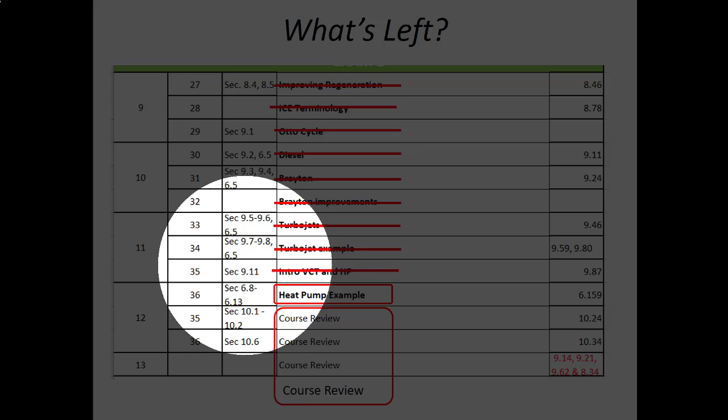So today is the last class with new material, and it's new in that we'll be doing an example of a heat pump cycle, which, as we learned last class, is essentially the same as a refrigeration cycle. The difference is our energy benefit — whether we're interested in cooling down the cold place or heating up the hot place.

After this class, we have 2 more classes this week, which I've reserved for course review, and then also 2 classes next week because the semester doesn't end till Wednesday. So we have a total of 4 potential review lectures.

My idea for the first review lecture is to have maybe 10 minutes of content to share, a general overview of how to do cycles. But then I'd be interested in having students look through the textbook and pick a cycle type that we can go through together as an example — something I haven't seen before, so you can ask me the question and I'll show you the method I would use to solve it.

So in 2 slides, we'll talk about which different cycles we can look over, and if people have a preference of which cycles we can do on which days.

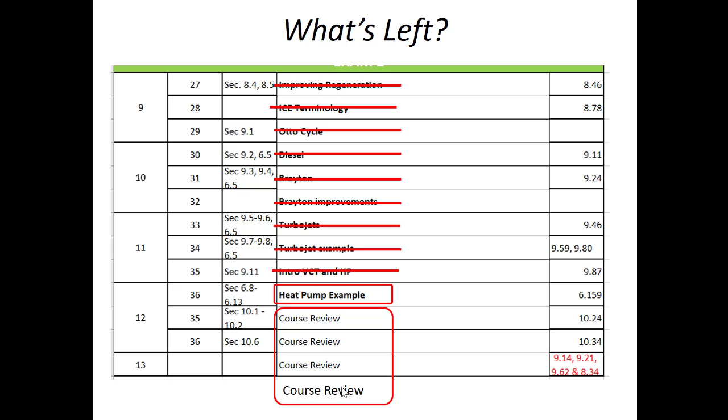But before we do that, today is August 3rd, Monday. So we have all of this week and then half of next week until the end of the semester. And then we will have our final exam on the 14th.

That's the Friday. The final exam will consist of 10 multiple choice problems, just like the midterms, but then 3 long answer problems — an extra long answer problem versus the midterm exams. You can certainly expect that these long answer problems will ask you questions about the cycles we've been going over since the second midterm.

In the midterm exams, we ran the exams from 3 to 7. Because there's an extra exam problem here, I've extended the time by half an hour, so we'll go between 3 p.m. and 7:30 p.m. Eastern Standard Time, the time here in Rochester.

Just like for the midterms, I'll run a meeting in this same meeting room from 5:45 to 7:30 if people have questions. You can also send me emails with questions, and I'll try to be on top of those in real time as they come in, so I can answer emails as well.

If you have approved accommodations, we will adjust the time accordingly based on the accommodations approved by the university. I'll put out a notification of this timing on the website right after class, and I'll also send out an email asking people to let me know if they have a conflict with this exam time as soon as they can, so we can reschedule to a different time.

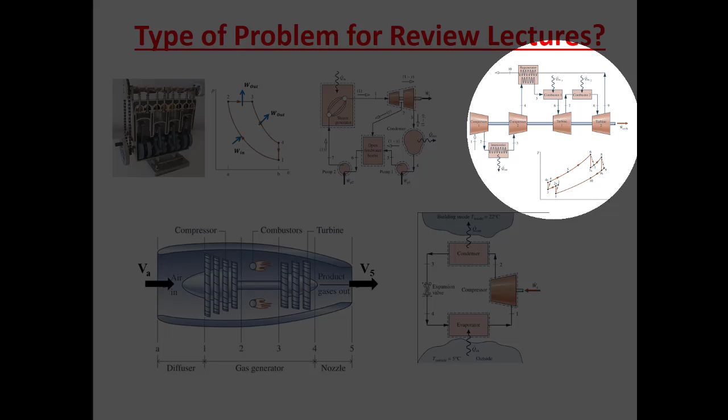Then we talked about Brayton cycles. Here's a picture of a Brayton cycle with all the trimmings - it's got intercooling, reheating, and also regeneration here. So knowing how to draw a TS diagram like this and analyze a cycle like this could be important. We could go over a class like that, or a cycle like that.

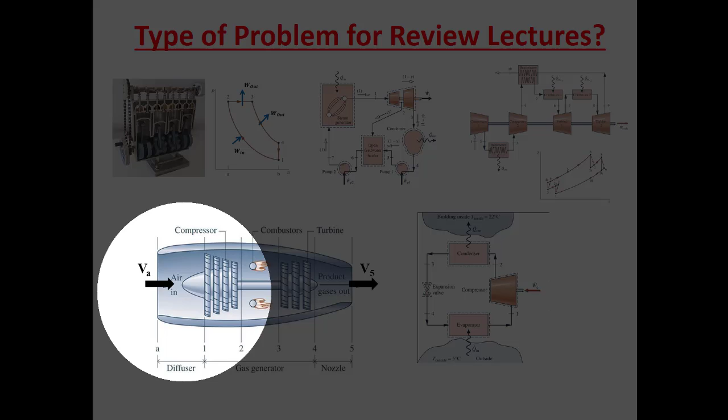We talked about turbojet engines. The difficult part about the turbojet engine is the diffuser and the nozzle, since we have this kinetic energy part of the problem, which is something we don't see in other cycles. It's also a cycle where the working fluid is an ideal gas. So just like with internal combustion engines and Brayton cycles, it's important to be able to identify the isentropic processes here so we can figure out when we're supposed to use the isentropic relationships.

Finally, the last type of problem we did was this refrigeration or heat pump cycle. We're going to do an example of that today. Really, this is the same cycle - it looks like a Rankine cycle in reverse, but we have this expansion valve instead of a turbine. If it's a refrigeration cycle, we're interested in the heat coming into the evaporator, leaving our cold reservoir. And if it's a heat pump, like the example we'll do today, we're interested in the heat leaving our condenser, going into our hot reservoir.

So I guess we have four students here today. Does anybody have a preference for what cycle type we talk about next class? Is there a type of cycle that you found particularly difficult?

I would like to look at diesel cycles more. Sure, so Jack, do you mind? This is, I guess, when you answer the question you're also volunteering a little bit. Because I would like for the first time I see the problem to be when we get to class, so you guys can have the opportunity to see how I would solve it. Do you mind trying to find a sample diesel cycle type problem for next class? That's fine. Perfect. And then I thought someone else was unmuted there before Jack answered.

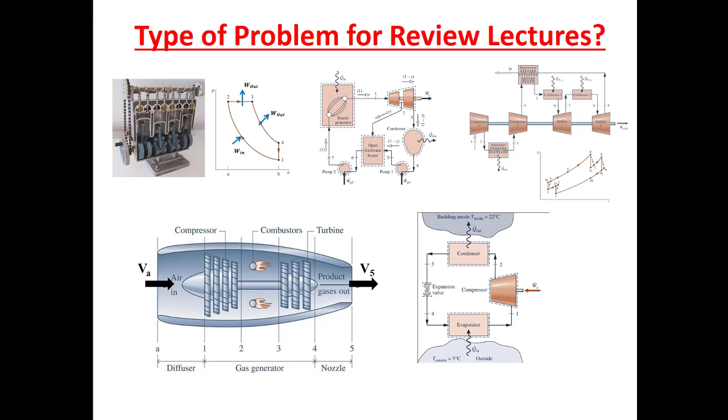So with that, we'll move on to today's lecture. Today we've been talking about these vapor compression heat pumps and refrigeration cycles, right?

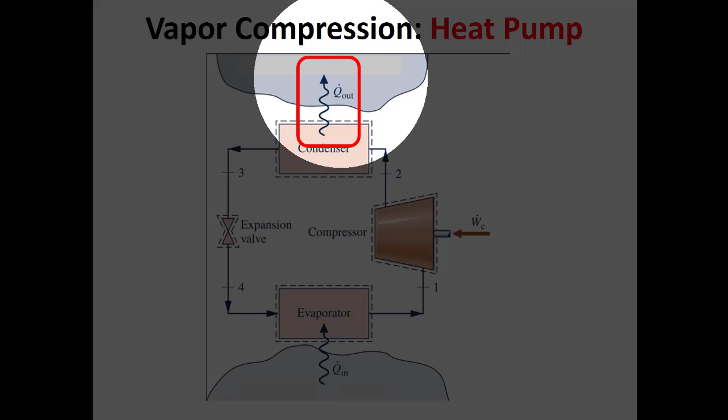I've been talking about how they're kind of like doing Rankine cycles in reverse. So the difference between a heat pump and a refrigeration cycle, in both cases it's like a Rankine cycle where we're moving back and forth across the vapor dome, but it's different than a Rankine cycle because the energy benefit and the energy cost are different. In a heat pump, the energy benefit is the heat leaving our condenser that goes into our hot space. So the purpose of the heat pump is to heat up the hot space.

It's important for all of these cycles to be able to draw TS diagrams. When we're drawing a TS diagram, one question we have to ask is, what's the working fluid? Because if the working fluid is water or a refrigerant, we need to know to draw a vapor dome. So that's what I've done here.

I know that as I move through the condenser, I'm going to condense the fluid. In this case, this is probably a bit unreasonable for a real case, because you probably want your evaporator to have saturated vapor over here, so your compressor is compressing a vapor. But I wanted, when I drew this cycle the first time, to have one constant temperature at rejection and one constant temperature at the heat transfer in. So here it's all under the vapor dome, which wouldn't necessarily be the case.

In our condenser, we're condensing our liquid until it gets to a saturated liquid. Then we move through the valve. Here in the valve, I've intentionally drawn this as a slanted line, not vertical, because I want to note that this is not an isentropic process. Remember, the assumption we make when we go through the valve is that it's isenthalpic, meaning delta H is equal to 0.

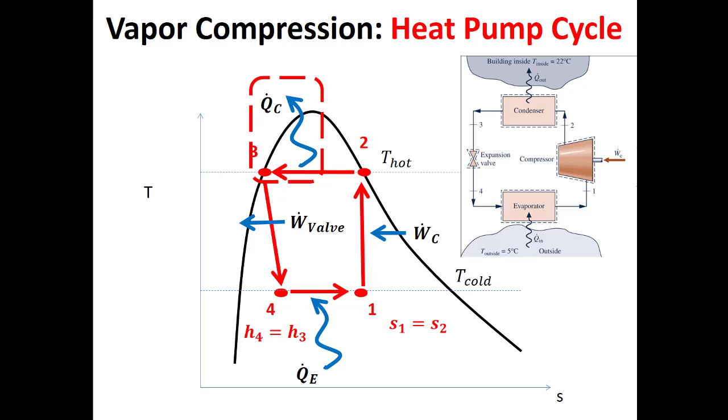So here, if we want to define our characterization parameter, because this is not a percentage value, it doesn't go between 0 and 100% or 0 and 1, we don't call it an efficiency. Instead, we call it a coefficient of performance. It's still energy benefit divided by energy cost.

In a heat pump, the energy benefit is the heat transfer on the hot side, and the energy cost is the power required to run the heat pump. Remember, we've got to plug this into the wall to run that compressor.

Because the mass flow rate is the same for both the heat transfer on the hot side and for the power going in, we can make these little q dot divided by little w dot, which is just going to be delta H divided by delta H. We just got to make sure we get the right state numbers in there.

We could, or a problem could ask us to compare our actual performance to our Carnot or our ideal performance. And if we wanted to find the Carnot performance, we would take T hot divided by T hot minus T cold. And we'd have to remember to do this using absolute temperatures, so this is either Kelvin or Rankine.

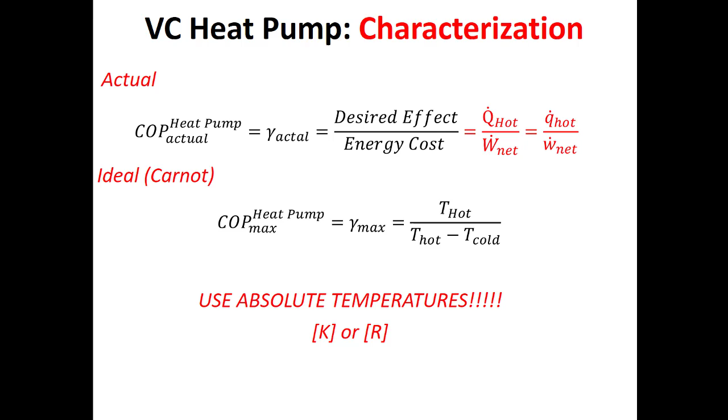So what do you do if you're lost? If you're on this kind of a problem, or really any kind of problem, you've got to ask, is it open or is it closed system processes as I'm going through my cycle? In this case, it's open system processes because the mass is moving through our cycle and different processes are happening in different components. So we've got to say, where do we draw the control volume?

What happens to the mass? So conservation of mass here, we're not splitting anything off, so conservation of mass is pretty straightforward. M dot in is always equal to M dot out. So there's only one mass flow rate in this problem.

Then we've got to say, what happens to the energy, right? So we could do the first law on each of these different components. And in an exam problem, we could ask you to demonstrate that certain processes were possible. So you could do a second law analysis to figure out if that sigma dot term was positive, because that's what we know for real processes. We're always generating entropy.

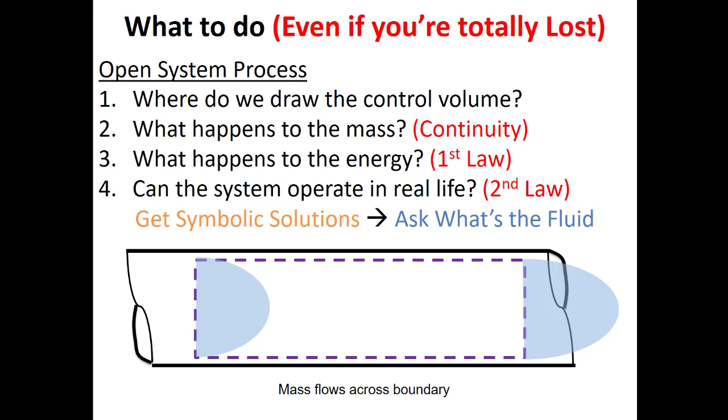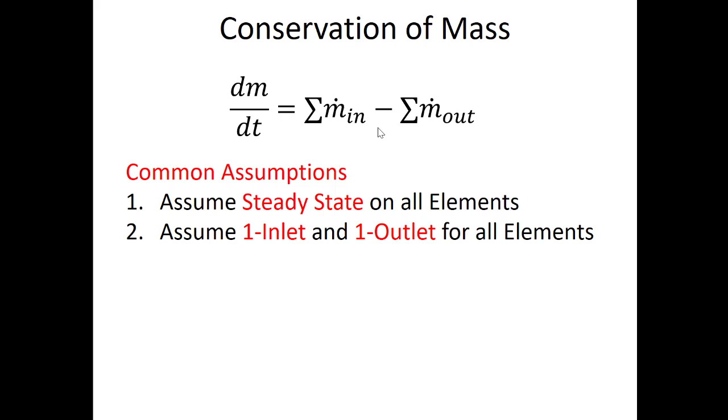Conservation of mass, hopefully this is no surprise: dm by dt is equal to the sum of m dot in minus the sum of m dot out. All components here will be at steady state. For each component, there's only one inlet and one outlet. So m dot in is always equal to m dot out, meaning there's only one mass flow rate in the problem.

For each component, we'll write down the first law. Here I've written the first law down as if this is an imperial problem, although in this case, we're going to neglect kinetic and potential energy for all of these processes. So it's different than a turbojet where we cared about kinetic energy for the nozzle and the diffuser. So even if this was an imperial problem and I missed the gc, I'm just going to cancel it out anyway, so at least I wouldn't get—I'd still be wrong, but I'd be wrong in a way that didn't impact my final answer.

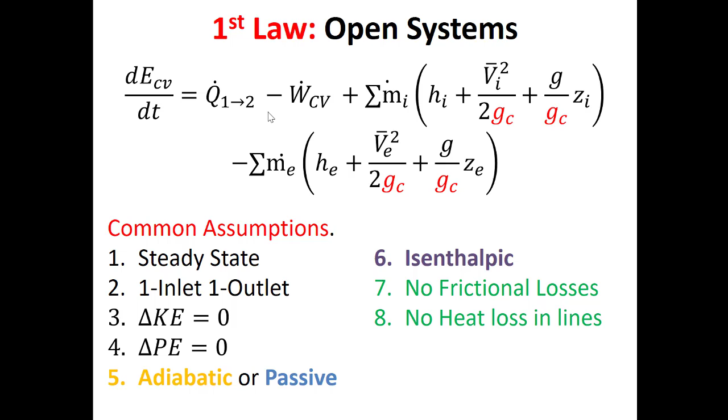So here, assumptions that we might make include steady state, one inlet, one outlet. We'll always neglect kinetic and potential energy in these systems. We'll look at each process and say, is it adiabatic or is it passive? If it's a valve, we'll say it's isenthalpic, so it's adiabatic and passive, and then H in is just going to be equal to H out. Between the components, we'll say there's no friction losses and no heat losses in the system.

If we cared about the second law, which is something that we might have to care about on the final exam, then we'd be interested in what happens to this sigma dot term. We know that if it's 0, that's not possible, but it's kind of the limit of what's possible, right? That's the ideal case.

If it's negative, we know it's not possible, but if it's positive, then we know that the process can happen in real life. Here, if I'm dealing with the second law, the term that really, if I'm going to mess up, it's going to be this term. I get Q dot—the same Q dot I'd get for the first law, same sign convention. My T surroundings is the temperature not inside my control volume, but on the boundary, or failing that, far away from my boundary on the outside. So this is the second law, and we'd be probably asking a question like, is it possible?

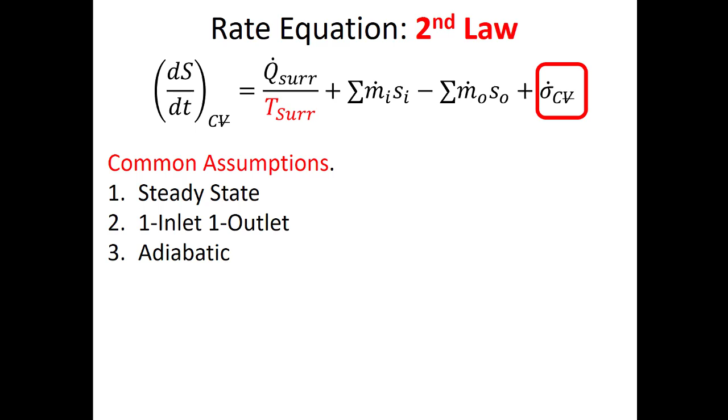And that depends on the value of sigma dot, or at least the sign of sigma dot, right? Then we'd get to some kind of algebraic expressions—symbolic solutions. We might have to find things like delta H and delta S.

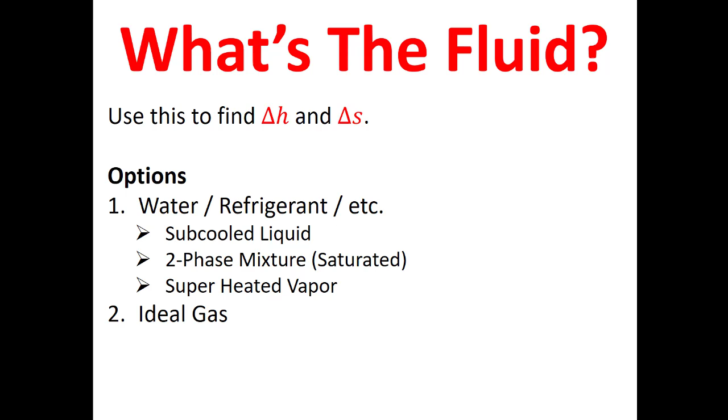So we'd have to ask, what's the fluid? If it's water or refrigerant, this is always a two-part question, right? We'll have to say, well, is it subcooled liquid, a two-phase mixture, or a superheated vapor? If it's an ideal gas, we'll have to say, am I going to solve this with constant specific heat or am I going to use variable specific heat?

For delta H, for a heat pump problem, we might use one of these pH diagrams. We could use refrigerant tables in the textbook. We might have to use an ideal compressor, so if we were talking about a compressor that was ideal, we know that it's isentropic. But if it's a real compressor, first we find the isentropic outlet, and then we look to use the isentropic efficiency for the compressor. For the valve, we'll make the assumption that it's isenthalpic, right?

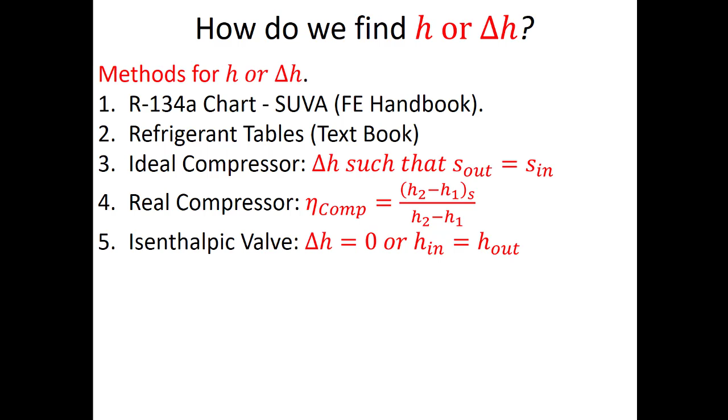I know these words can sound the same, but they mean something different. Isenthalpic means that delta H is equal to 0. So across that valve, H3 is equal to H4.

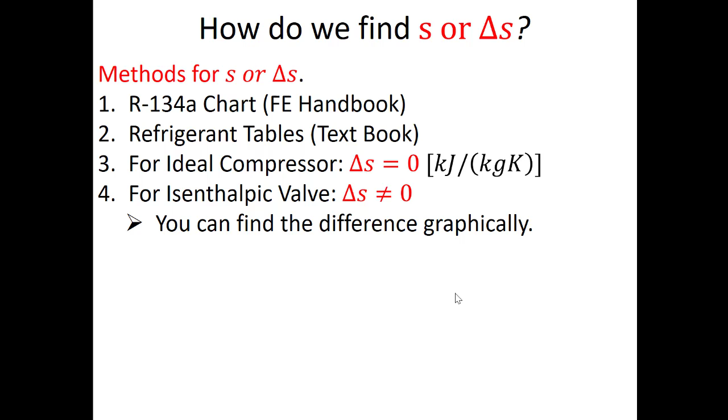There's also different methods for finding S. Again, we can use the pH diagram, we can use the textbooks. For ideal compressors, delta S is equal to 0. For an isenthalpic valve, delta S is not equal to 0, right? Isenthalpic means delta H is equal to 0. So I usually kind of exaggerate this when I draw it on a TS diagram so that this is more slanted than it probably would be if I was drawing it to scale.

So we talked about this pH diagram, and this was something we only really introduced when we started to talk about this particular cycle. It's a scale drawing of a vapor dome. This is relevant if you were doing an FE exam—as you get closer to graduation, if you'd like to get your engineering certification, to be a PEng, you have to write that test. They won't give you tables for refrigerants; they'll give you a diagram like this, and you'll have to demonstrate that you can solve this graphically.

So that's what we're going to do in the example today. We've got to remember here that the enthalpy values here have a different zero than the enthalpy values in our textbook, so we can't sort of do the problem half and half. We either have to do it all in the textbook, or we have to do it all on this graph. We can't split it half and half because they have a different value—you can't really do a problem half in absolute pressure and half in gauge pressure unless you're converting between the two.

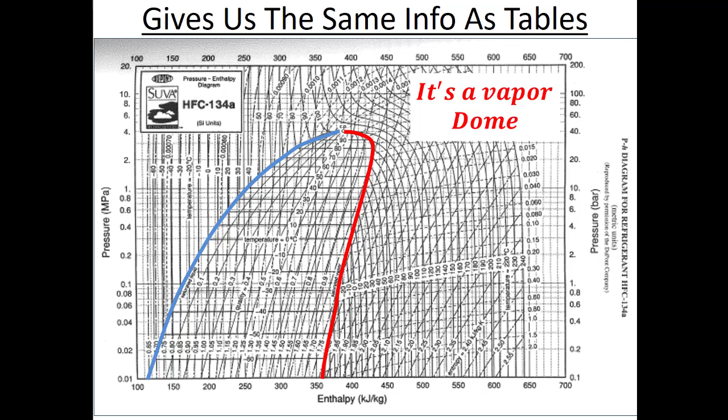So here is the example problem that I picked out. This is example 10.35 from, I think, the 8th edition of the textbook. So here we have this heat pump. We know that the high pressure is 200 psi, so heat rejection in the condenser happens at 200 psi. We're told that this Q dot out is 60,000 BTU per hour, right?

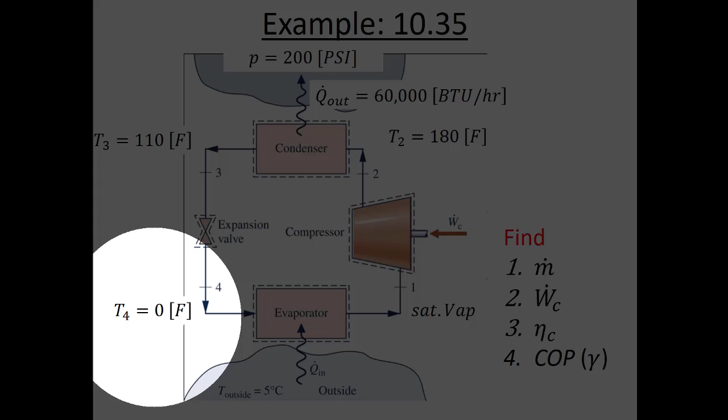So here we get some value here. It's not BTU per second, but we could convert that, or we can just leave it. We're told the temperature at state 2 is 180 degrees Fahrenheit, the temperature at state 3 is 110 degrees Fahrenheit, which makes sense—we're cooling the fluid down as we go through the condenser, and we're rejecting that heat into our hot reservoir. We go through this expansion valve until we get to a pressure where the temperature here at state 4 is 0 degrees Fahrenheit, right?

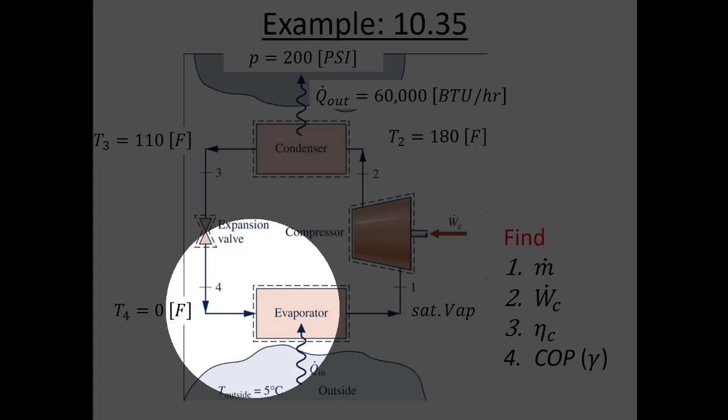This is the cold side, right? So in the evaporator, potentially, if we were under the vapor dome here, then we'll be under the vapor dome the whole time until we get to saturated vapor. Then we go through this compressor, increasing the pressure of that vapor until we get back up to state 2, where we're at 200 psi and 180 degrees Fahrenheit.

So this is the information we're given for this particular process. We're asked to find the mass flow rate, the power consumed by the compressor, the efficiency of the compressor — the isentropic efficiency of the compressor — and also the coefficient of performance. Here, because it's a heat pump, this is gamma. If it's a refrigerator, it'd be beta. But if you just want to call it coefficient of performance, that's fine with me too on an exam.

So what do we do? We always have two possibilities, right? We can start fixing states right away, or we can do the symbolic solutions. If you're working on an exam, particularly if you're pressed for time, I would get the symbolic solutions first, because if you think about a test like a game where you're trying to maximize points per time, I think getting the symbolic solution gives you more points per time than fixing the states. But you can start fixing the states too, if you feel more comfortable that way. You can do it either way.

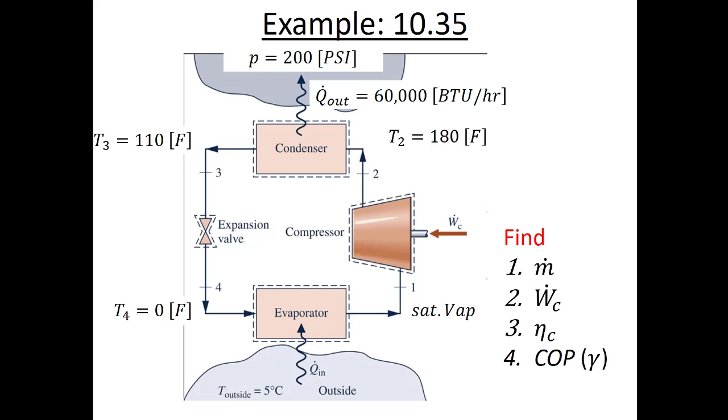If you don't remember how to find the different lines or how to fix states using a graph like this, there's an example in the lecture we did on Friday, posted on my YouTube channel. But we'll also go through and fix all the states for this problem here today.

So here we know something about some states. This is kind of weird because I'm going to start at state 2, since at state 2 I was told two independent intensive properties. You could start at a couple of different places in this problem — you could start at state 1 as well. But here we know that at state 2, we have 200 psi.

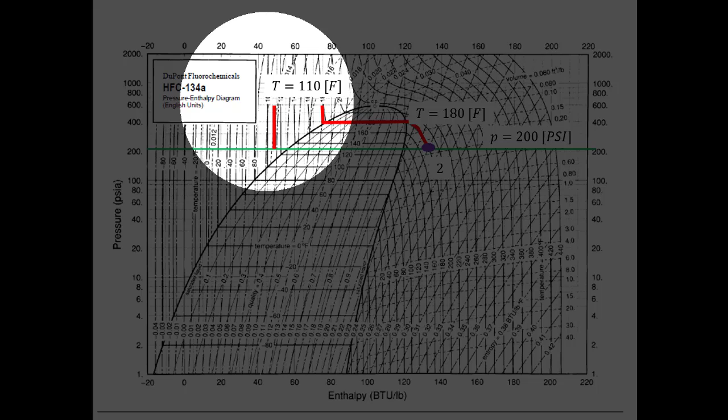Remember, we're rejecting heat here, so we're condensing our working fluid from a vapor down to a liquid. We move at 200 psi from 180 Fahrenheit down to 110 Fahrenheit. So here's 100, there's 120. I tried to pick a line that I thought was halfway in between here.

This is vertically down, where these two things intersect, that's going to be state point 3. So now I've got state 2 and I've got state 3. What do I need next? I can go to state 4 next. So as I go between state 3 and state 4, I'm going through that isenthalpic valve. Remember, isenthalpic means that H is not changing. So I am dropping my pressure, but they didn't tell me the pressure at state 4 or at state 1.

Instead, they told me the temperature. Here, they said the temperature is 0 degrees Fahrenheit. So I follow this line down. And remember, temperature and pressure are dependent under the vapor dome. So here I have a horizontal line for this constant temperature. This is at about 20 psi. So I've gone down from 200 psi down to 20 psi, an order of magnitude, or a factor of 10.

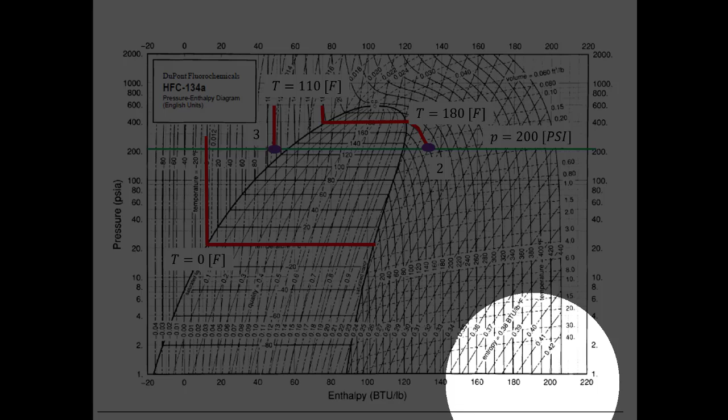But now as I move through this valve, delta H is equal to 0. But H is here on this horizontal axis, so a constant enthalpy line is a vertical line. So I can just drop a vertical line down from state 3, and where it intersects this 0 Fahrenheit line, that's going to be state 4.

Now I got state 2, I got state 3, I got state 4, I need state 1. So they told me state 1 was saturated vapor at 0 degrees Fahrenheit. So I got my 0 degrees Fahrenheit line. Saturated vapor is the same thing as quality equal to 1, so I'm right here at the rightmost edge of the vapor dome. So my state 1 is here.

So with these 4 states, I can answer most of the problem. I could tell you about the heat that gets rejected, I could tell you the power from the compressor, I could tell you the heat that gets added on the evaporator side, but I couldn't tell you the compressor efficiency, because to find the compressor efficiency, I need to know how much power the real compressor consumes, but I also need to know how much power the ideal compressor consumes. So I need not just state 2, but I also need state 2s.

The isentropic outlet, if we had an isentropic compressor. So for that to happen, I need to find a constant entropy line that goes from state 1 to state 2s. Now here, these entropy lines, I always find these ones are the trickiest to draw because the slopes, they're almost parallel, but they change a little bit. So here's one constant entropy line, and here's another constant entropy line, and I'm kind of in between those. So I'm going to draw a line that hopefully splits kind of those two constant entropy lines. This is this dashed blue line. This is my constant entropy line.

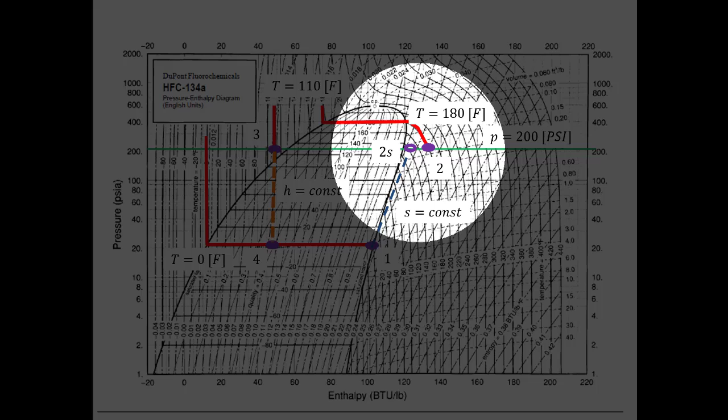And I'm going to put state 2s on my diagram here, and I'm going to make that an open circle, although it looks a little more like an ellipse. Maybe I squished it a little bit. That's going to be my state 2s. So here, this makes sense. If I went through the isentropic compressor, my specific entropy is less than if I went through the real compressor, because these are constant entropy lines. I'm moving to the right as entropy or constant entropy increases.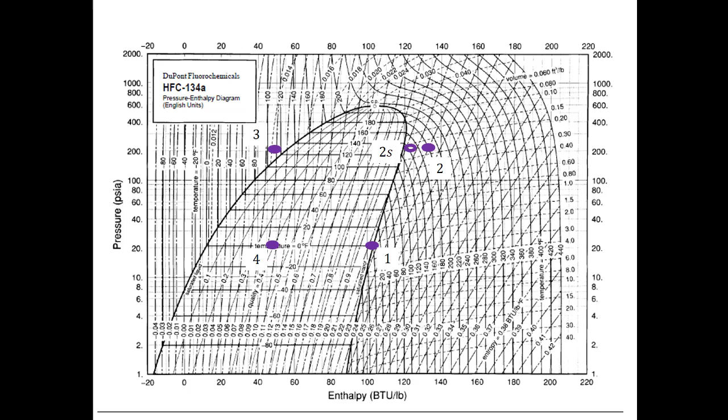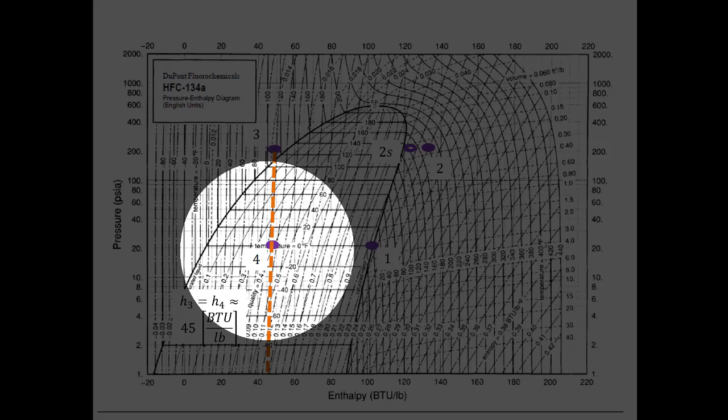So now I have on my diagram state 1, state 2, state 2s, state 3, and state 4. Through the magic of PowerPoint, I'm going to kind of erase all these other lines, because what I want to do is find the specific enthalpy values associated with each one of these states. Now the good news is state 3 and state 4 have the same enthalpy, or the same specific enthalpy. So I drop this vertical line down between state 3 and state 4. I'd already done this, so really I'm just extending this down to the x-axis here. This is a linear axis here in the horizontal axis. There's 40, there's 60. I've got to sort of graphically estimate this.

If I was really trying to take my time, I'd maybe measure this with a ruler, how many millimeters between here and here, and get a scale. But I'm going to say that if this is 40, this is 60, 50 is kind of around here, and this is about halfway in between 40 and 50. So I'm going to call the specific enthalpy of H3 and H4 45 BTU per pound mass.

It's not going to be exactly right. Every time we solve a problem graphically, we get the benefit of doing it faster, but there's a trade-off: we're sacrificing accuracy. So I'm going to say that this is about 45 BTU.

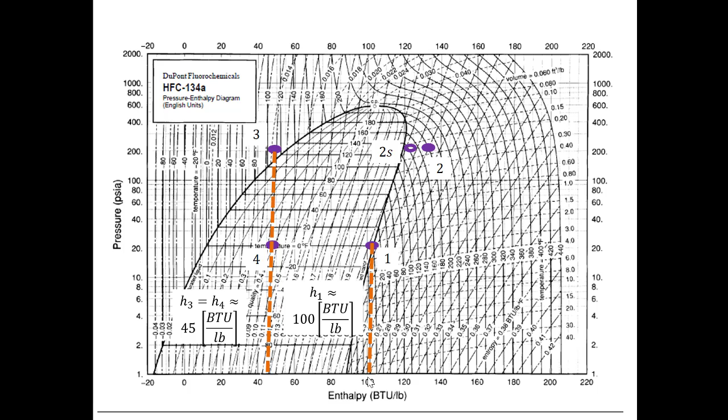I can do a similar thing with state 1, drop a vertical line down to find the specific enthalpy. This is going to be 100 BTU per pound mass, at least that's what I'm going to say. State 2s, I'll say that comes down at about 120 BTU per pound mass. And state 2, I feel like it's past 130, maybe not halfway between 130 and 140, so I called this 133 BTU per pound mass.

If you get an exam problem like this - and I keep saying this, but few people do it - use colored pencils. So if you get an exam problem like this, it's nice to draw different lines with different colors so they're easier to see at different times.

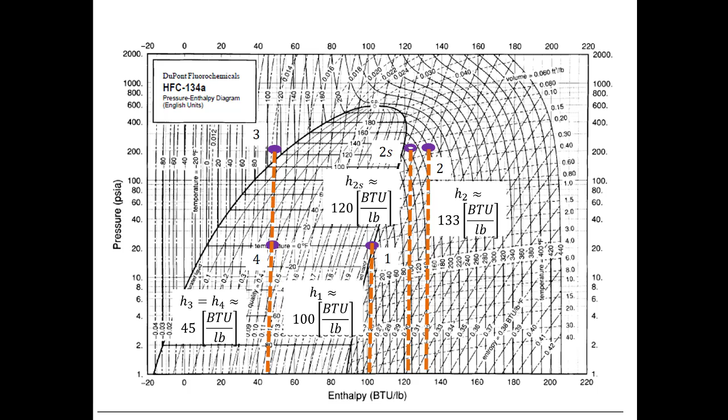I'm not really going to be grading your accuracy on the numbers you pick off a table like this. Instead, what I will do is grade your process - that's kind of always what I'm doing. Maybe if you mess up the math a little bit, you'll lose a point or two, but as long as you're anywhere in the ballpark when reading these things graphically, that will be fine with me on an exam.

So now we've fixed all our states. We can now go into the part where we think about the symbolic solutions for the different parts of the problem. First, I'm going to do the first law on the condenser, because I think the first thing it asked for was the mass flow rate. So if we're trying to find a mass flow rate, we want to look for maybe a component where it's adiabatic and passive, so maybe we have two different mass flow rates - but that's not the case in this problem.

Instead, if we're trying to find a mass flow rate, we look for some place where we know the power or we know the heat rate. In this case, we know the heat rate, we know Q dot when we move through the condenser. So to find M dot, I'm going to do the first law on the condenser.

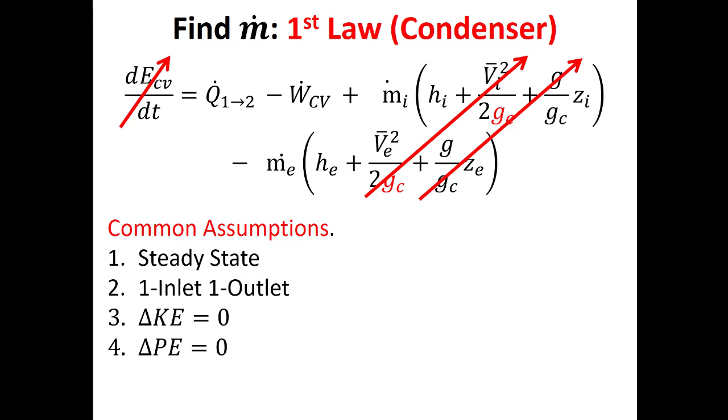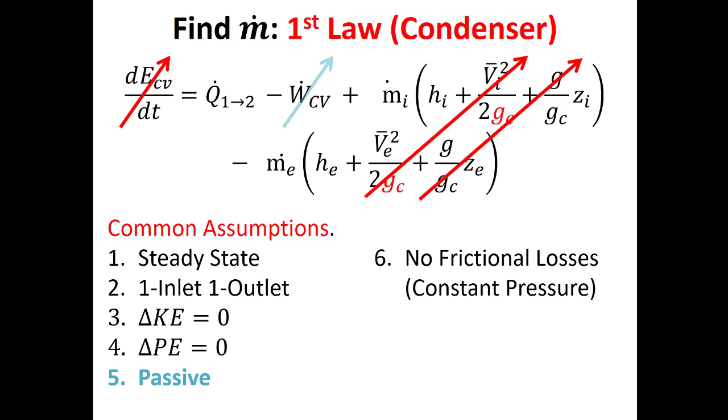I'm going to assume it's at steady state, one inlet and one outlet, that the change in kinetic energy is 0, the change in potential energy is 0, that it's passive with no friction losses so this heat rejection happens at constant pressure, and that there's no heat loss in the lines throughout the system - although I guess technically I didn't need that last assumption in this case.

When I do that, I get this expression, which is what I'm expecting when trying to find Q dot. This is Q dot from 2 to 3, through the condenser, equal to M dot times H out minus H in. In this case, I know Q dot, and I know H3 and H2 because I already fixed all the states, so the only thing I don't know is M dot.

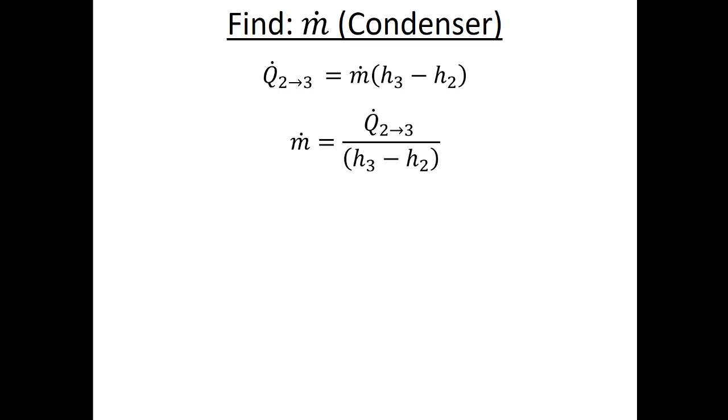So M dot is going to be big Q dot divided by H3 minus H2. The problem told me that 60,000 BTU per hour is rejected as I move through the condenser. This is heat out of my system, because the system is inside the condenser and heat is leaving the condenser, so this is negative 60,000 BTU per hour.

I fill in my values for H3 and H2 down here. So I'll get, and this is nice because I see H3 is less than H2, so this is what I'm expecting. I'm going to get a negative number in the denominator as well, and I'll find that I get 681.8 pounds mass per hour.

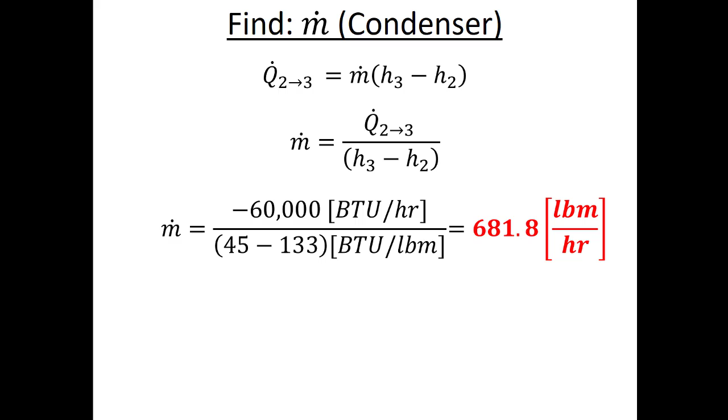I could turn this into pounds mass per second if I wanted to, but the problem just asked for the mass flow rate. I don't think they cared about the units, so I could probably put this in any unit that I like. If it was a test, I would just stop here unless they specifically asked me for an answer in something like pounds mass per second.

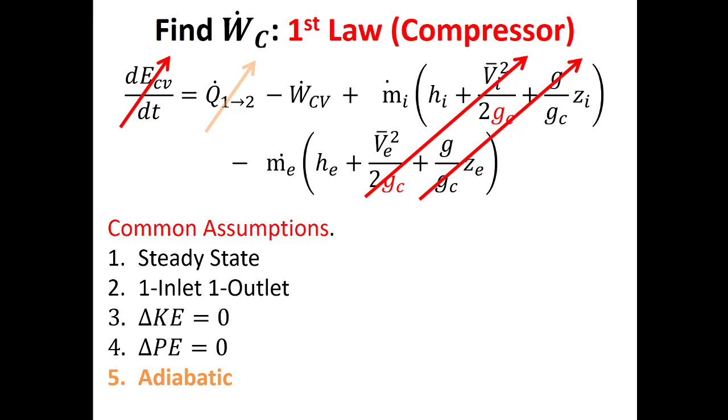Next, they asked me for the power consumed by the compressor. So to do that, I'll do a first law analysis on the compressor. It's at steady state, one inlet, one outlet, no kinetic or potential energy changes, it's adiabatic, no friction losses, and no heat losses between the lines.

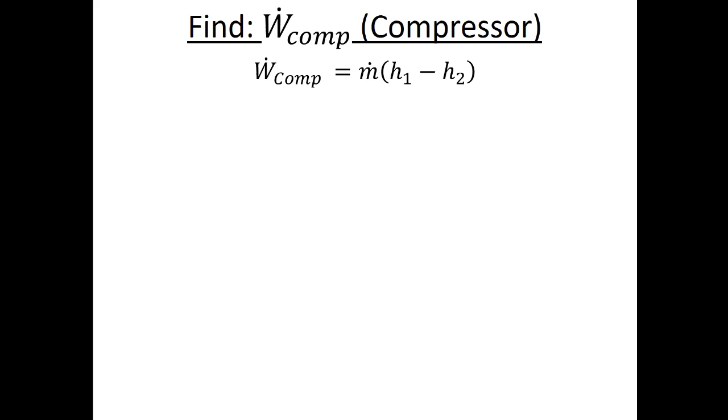So we only have 4 states, I guess 5 if you consider 2s. Here I know that the power consumed by the compressor is going to be m dot times H1 minus H2. And because the compressor is consuming power, we know that the value here is going to be negative.

So here we found m dot. It's like the problem asked us the parts in order for a reason. I know H1 and I know H2. I see that H2 is bigger than H1, which makes sense because we're compressing our working fluid. We're putting energy into the fluid, and enthalpy is where it gets stored.

So here we get negative 22,473 BTU per hour. And the problem, I don't think, asks us for a particular unit, so on a test you could leave it like this. But if you went to Home Depot or something and asked for a compressor with a power of 22,473 BTU per hour, you might not find somebody who can help you.

So we might want to convert this into horsepower. If we do, we would look on some kind of equation sheet. We would see that the conversion factor to get from BTU per hour to horsepower, we have to divide by 2,545. It's not a nice round number because we're dealing with the imperial system here. And we see that the power of the compressor is 8.83 horsepower.

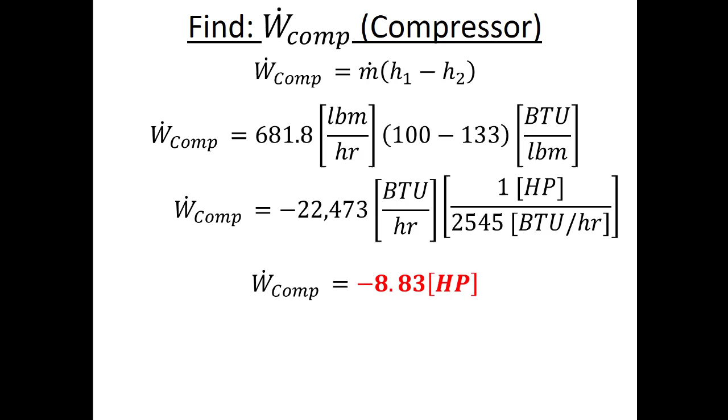So that's good, now we found part B. The next thing the problem asked us for was, how do we find the isentropic efficiency of the compressor? We know that the compressor, the energy here is a cost, so we know that if we were looking at the ideal compressor, we would pay less. The cost would be less. So here we put the ideal compressor on top of the real compressor.

Now, if we were doing this problem beforehand and we didn't realize that we had to get H2S, that would become apparent when we did the symbolic solution here. So this is actually an argument for doing the problem in the opposite order that I did it in this example. If we did the symbolic solution first, then the symbolic solution would tell me the variables that I need to find in order to fix the states.

So I guess I had to use my engineering intuition when I was fixing the states to know to look for H2S. But if I didn't know that, I would get to this point in the problem and say, oh, I got to go back to my diagram and find the isentropic outlet for the compressor. But I've already done that, so I have these values. I get negative 20 on the top and negative 33 on the bottom, so my compressor efficiency is just over 60%.

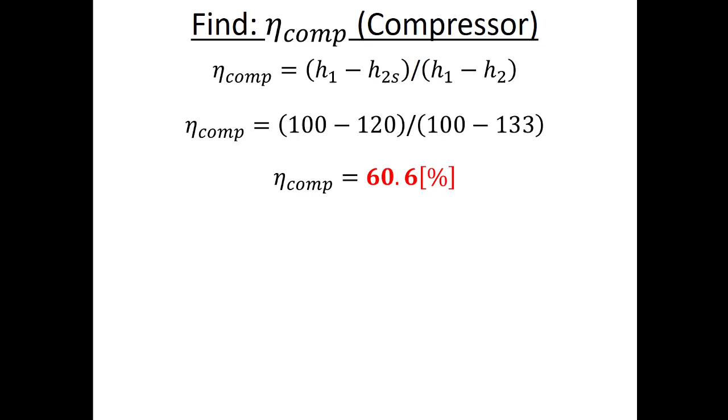Finally, I'm asked to find the coefficient of performance, so I want to characterize how well the whole cycle does. Here, my coefficient of performance, because this is a heat pump, I use the Greek letter gamma. I divide the desired effect, the energy benefit, divided by the energy cost. That's what I do in all of these cycles. The energy benefit is the heat transfer rate on the hot side, and the cost is the net power.

So if I wanted to factor out the mass flow rates, I could also look at little q dot divided by little w dot. But here I actually already have big Q dot and big W dot. So in this problem, I've sort of broken this down.

The problem told me right away what Q dot on the hot side was, so I wouldn't do any math. I wouldn't use any thermodynamics to find this value because the problem just told me this number.

I've already found this is the power consumed by the compressor. In my equation for net power, I've also included the valve power here. But we know that the valve power is going to be m dot times h in minus h out of the valve. But delta H across the valve is 0, so this valve power is going to be 0.

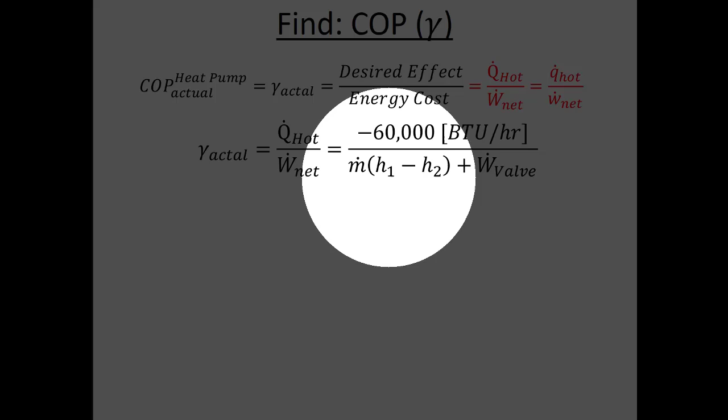I think part B of this problem was what's the power consumed by the compressor, so I wouldn't work this out again. I've already found that answer. So here, the heat transfer rate is negative 60,000 BTU per hour, and the power consumed by the compressor is 22,473 BTU per hour. That's also the net power because the valve doesn't consume any power.

So here I get a coefficient of performance of 2.67. If this was a refrigerator or an air conditioner, we'd have to take the absolute value of this coefficient of performance, because these coefficients of performance are always positive, right?

If you think about this from a marketing perspective, nobody wants to talk about how a refrigerator has a coefficient of performance of like negative 12 or something. That sounds bad, even though it would probably be pretty good. So these coefficients of performance are always positive, but for a heat pump it doesn't really matter because you have a negative divided by a negative.

The multiple choice questions will deal with some other cycles that we don't cover in the long answer portion. I don't think we saw this on the midterms, but for the multiple choice questions we'll also have some groupings. I may give you a diagram of a cycle, maybe a TS diagram or a PV diagram or a diagram of different components in a cycle, or a state table, and ask you a series of questions about that.